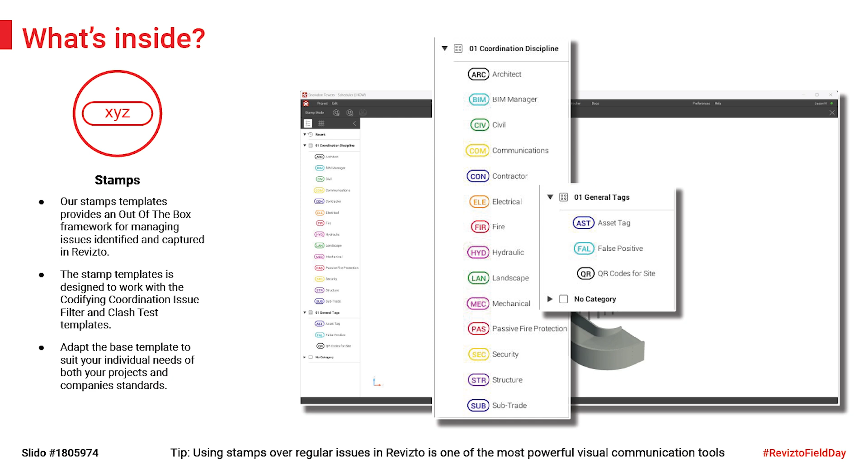Stamps, again, we've standardized all of these. The stamps are linked to the clash tests, so you could start to automate all of the process right out of the box within the 5 minutes, is what we've been telling people here.

Search sets, so these are all based off Revit families, Revit categories. So literally you can load these in and start to get some good results out of the tools straight from the start here. We've also linked it to IFC categories as well inside of Revit, so depending if you run an IFC workflow or Revit workflow, it will work for both of these.

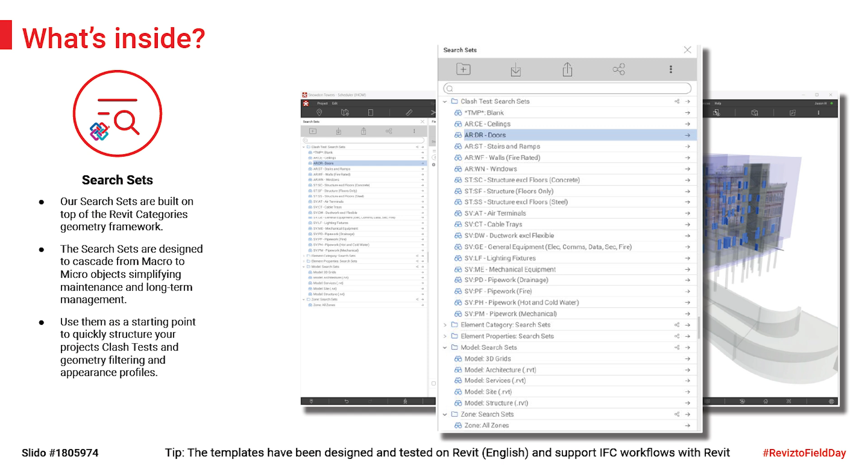And then the search sets are based on a kind of cascading system. By that we mean we've got the high level, which is the models, and these are cascading down into categories, properties, sets, and then finally clash tests at the bottom. By this hierarchy, what we mean is you can load it into different projects just by changing the model, which is the high level, top level search set. Everything is hung off this, so you literally just change the name of the project at the top level, and everything will work on that.

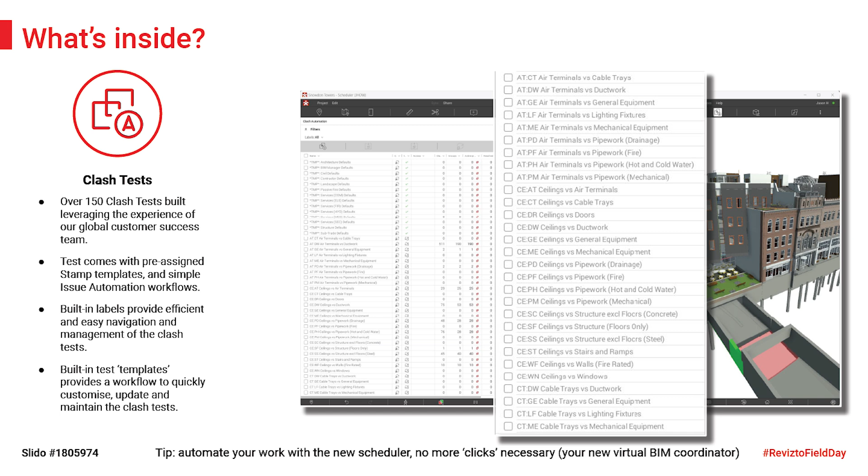So this is why it's so quick and efficient. We can get a project up and running quickly. I guess the clash tests is a big part of this. We've got over 150 tests in here, pre-assigned with different templates set up for architect or structure, MEP, things like that. All the stamps of load-in are all associated with tests as well, so again you've got that efficiency in there.

Properties based on Revit properties, we can very quickly get QTOs on the project itself by using the selection inspector. So it's a really efficient way. With the QSs, we've got some QSs down south who are using Revizto to get the quantities out of the model.

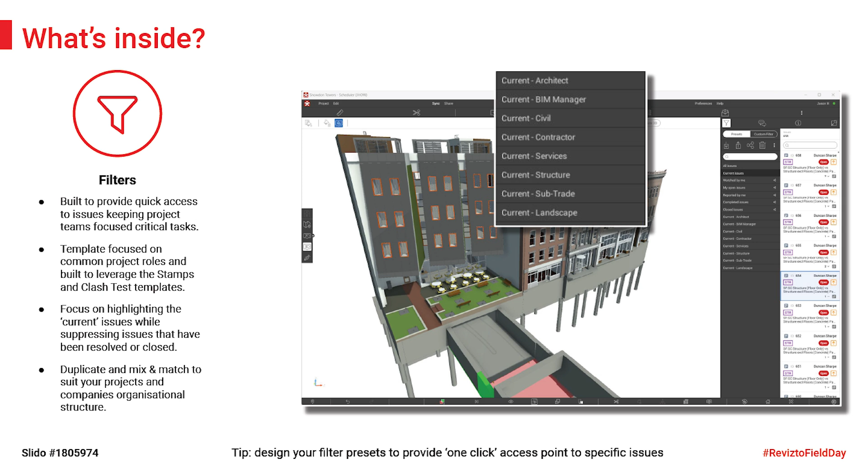Filters, simple one, but again it's standardizing the way that we work. These are inside of the issue tracker here, so we create filters for architect, BIM manager, MEP structure, things like that. Appearance templates, another easy one, but we've aligned some of the templates inside of the appearance templates, like BIM colors. So it's just applying colorization to that MEP - very simple to do, but we've standardized it.

We've got a webinar coming out in a couple of weeks, I think, where we're actually showcasing what we've done within Revizto, so keep your eyes out for that. Simple ones like architectural white card - things that you can standardize across the board.

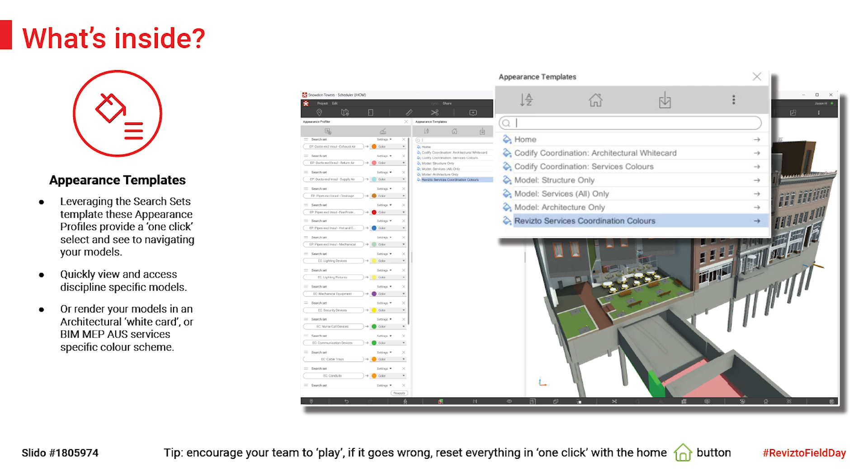So by 5.15 - people who've opened up Revizto this morning will notice this is hot off the press. We actually released it overnight. So what I'm going to show you today is just one of the new updates.

So what this enables you to do is automate a lot of the process, so you get the efficiencies out of the software. The main downside of the old scheduler is you couldn't run clash - that was a manual process.

What we've done with the new scheduler - this new user interface - is actually give you the ability to create tasks inside of the new scheduler. So you can still upgrade to 5.15 and have the old scheduler. It's an upgrade process, so when you click on new scheduler it's going to ask you what you want to do.

You can actually migrate all of your old tasks into the new scheduler, and if for whatever reason you want to push it back, you can go back to the old scheduler as well. So it's a completely new interface, and it's web compatible as well. We'll have a look at that in a second.

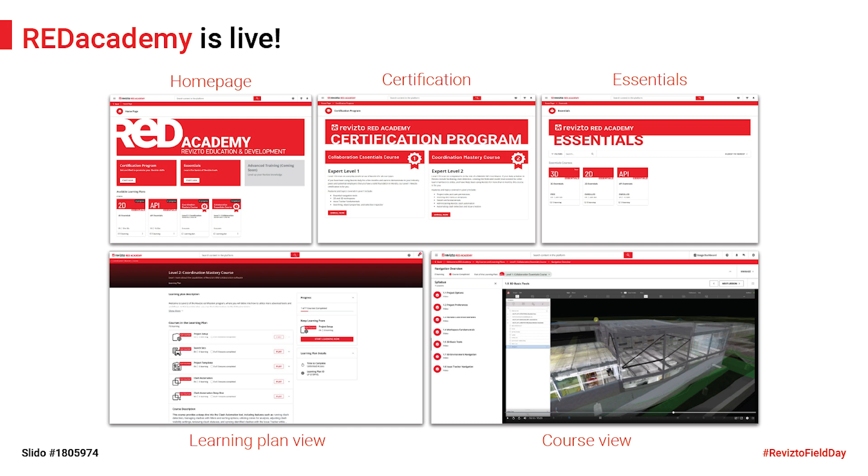It's live, go have a look. If you go around Revizto Academy, just log in, and the essentials course is free.

We've got a shout out to Jason Howden, who I'm sure most of you in the room will probably know. We'll be doing some percolating collaboration podcasts. There's a few people in the room who are already on it - Brad's been on it, Anton's been on it, Jonathan Dunn from South West Photography, he's here, he's been on it, Julie Jenner too. So we've got quite a few people from New Zealand that have been on there.

Some great insights into the whole industry, especially New Zealand. I keep stressing this to clients - New Zealand as a whole punches way above its weight in the global market. We see this, Jason sees this. Jason's been around the world and talked to various companies in design and construction, and he's fed it back to us. Basically what we're doing as a country is way above the benchmark for the rest of the world, so we need to shout about it and get out there, which is what Jason's trying to do with the podcast as well.

Final shout out to Revo, our global conference, coming out in February next year in Washington. Probably not the best location for February next year, but hopefully.

And also, when you set up the digital platform, the site control model, there's one gap: we want to make sure of everything we have done, for example, any builder's layout or set out we produced from the Revit file in the site control file. We want to know how the builder actually built it on site. We need to get the information back to us to say what they actually used the drawing for. For example, if the wall is set out 500 millimeters from a grid line, we want to know how the builder actually built that distance.

Because the site has lots of different conditions, they might be different. So we need the communication to be two-way. We're sending them the information, they're giving us back the information, and we update the model accordingly for the next phase of the work. The slides show we take as-built data as we go and feed it back into our digital site control model. We publish that information to Revizto, so Daryl, the project manager, and the site team can use good solid information to do their coordination work.

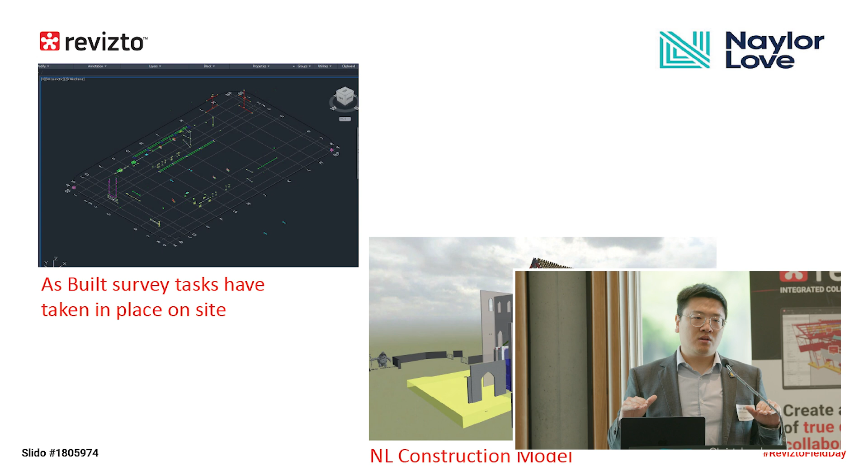One little thing I want to cover: from my background as a BIM manager, we have very limited ability to drive the construction process. We want to educate the project manager to drive the whole project, because they have a wider range to communicate with a lot of outside parties and internal teams. So if we can get the project manager teams using the tools, that brings the most value to the projects.

The last thing I want to cover is model structure. I know a lot of people here are BIM experts who have been using Revizto for years. They can find the geometry very easily using worksets, appearance profiles, and a lot of different fancy tools. But I'm facing the project teams, the project manager, the site foreman. We want to make sure that from the first step they find the right information. So the first thing was to make a very clear model structure, so people without any BIM knowledge can open Revizto, select the model tree, and find what they need.

As the project goes, we established a federated consultant model including all the consultant models, a federated temporary steel structure model, a federated permanent steel model, a federated reinforcement model, and a Naylor Love builders work model. Basically, it's clear, plain English. It doesn't have a fancy naming convention. It's very plain, so people can find the information as they go.

And to share a little on why we use Revizto from the digital perspective: Revit is our primary software, and from the BIM side the exporting procedure works really well for us. It's simple. From the digital point of view, it's also easy to set up for the site team. We can create a whole bunch of viewpoints, and Daryl can do that now as well. Stamps, tags, search sets, appearance profiles are easy to set up. And the last thing is great support from the Revizto team, because I've been down on the project.

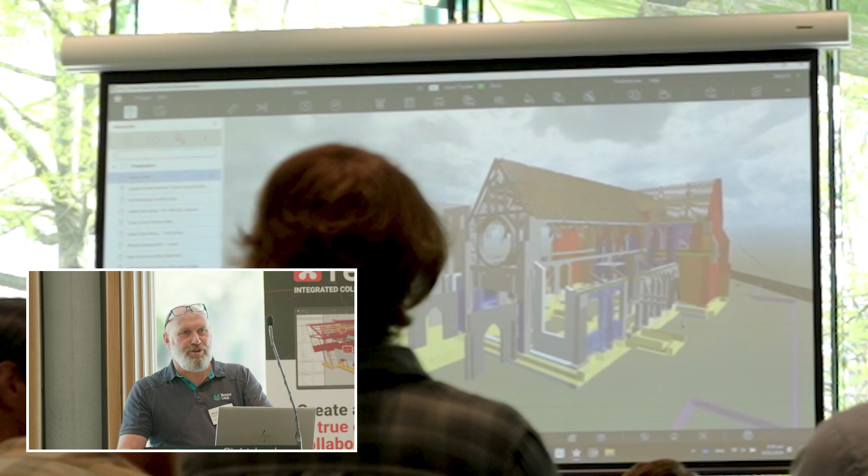So for me, this was my BIM learning journey. I started this project, and like I said, I just played around with some models. So the first thing for me was learning a bit of navigation. And it didn't take me long. I started figuring out how to move around quite efficiently for someone you might call an old dog learning some new tricks, because when I started in construction, I'd really never used BIM.

In recent projects, I'd definitely used it. I've used it a lot, but I hadn't personally done it. I've done it through others, and I've always needed other people to do things for me. Whereas the difference for me here was I started learning to use the 3D space myself.

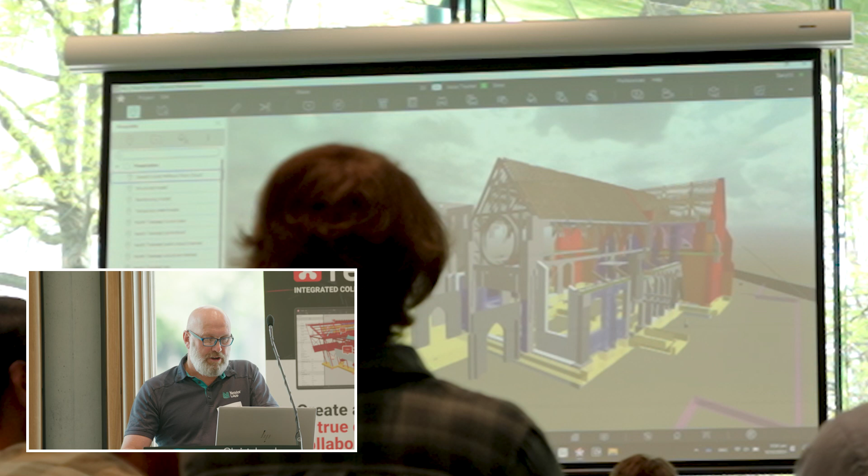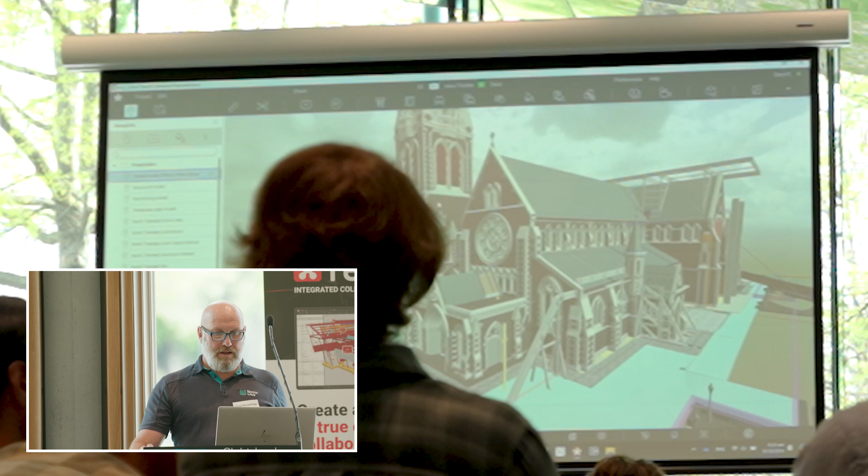And if I go through, we got given some models. We had an architectural model, a structural model. We brought in other models. We brought in our temporary works model from our steel sub. We brought in reinforcing models from a reinforcing sub. We brought in the services, all the models. And there's a lot of information there. And so I had to learn how to find what I was looking for. That's all our models together. There's lots of stuff there.

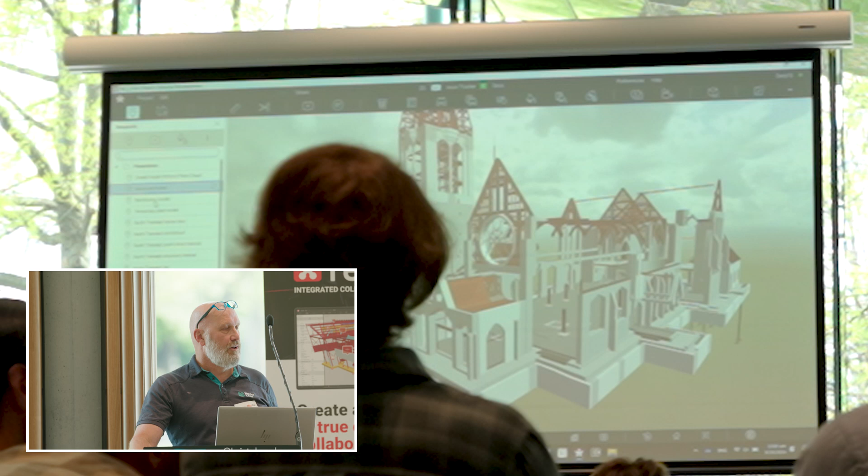The architecture is mostly seen because it's on the outside. But we had a structural model in the background, which is very good. But it doesn't have the detail. Obviously, the structural model won't show me the sort of things I need to know about buildability, about where the bolts are going to sit. Are they going to clash with something else? Because this is a heritage building. There's lots of heritage stone. There's lots of little bits and pieces inside that heritage stone where things are going to clash that we didn't know about until we got into the detail.

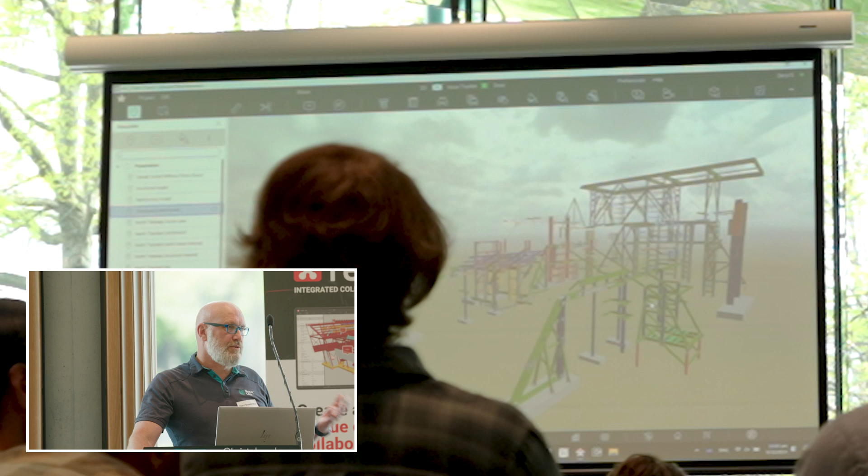So there's not just the permanent work. This is just the amount of temporary steel that has been modelled to date. This is just temporary steel, and a lot of it's in, and our permanent works have to work around this, and this work has to work around stone and heritage things and timber and all sorts of stuff like that. So there is a lot in here.

So for me, I had this learning journey to figure out how to look at it all. And as Sean alluded to, he set up the object tree with very clearly named models. Reinforcement, point cloud, site control.

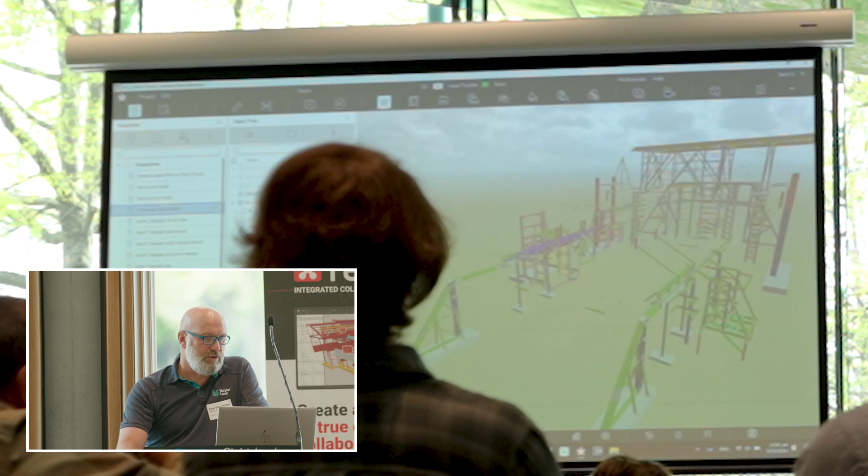So these were really good for me to help find my way around. So I've got the temporary works model. I can find the individual models. So as Sean said, he set it up in a way that for me, I could find what I wanted. I don't want to see the temporary steel. I want to see, say, the reinforcement.

It was very easy. And because I found it really easy and I showed it was easy to my site team, I had others start to use it who had never really touched sort of digital stuff as well. So it was navigation. I learned all sorts of things. I learned how to efficiently do cuts and all sorts of stuff. It's all new stuff to you, but it was actually really simple, and I knew I couldn't break it, so I could do whatever I wanted.

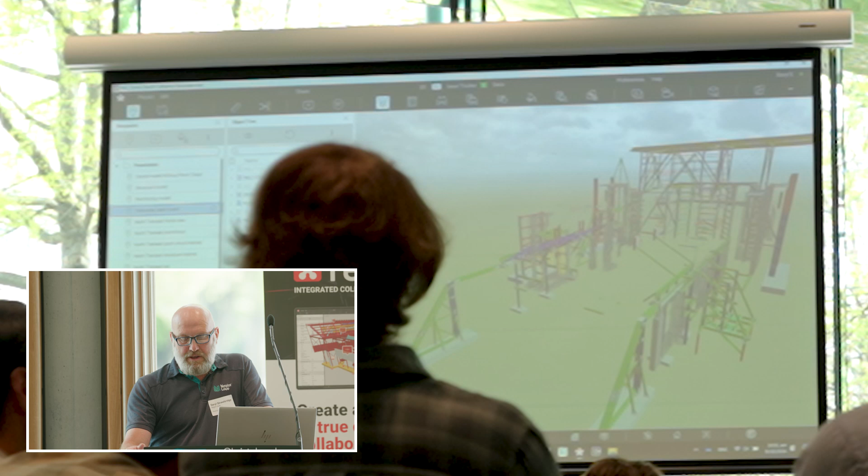But then I had to bring others on my journey, as I sort of talked about. So I started learning how to save a lot of viewpoints, and I just showed you a few viewpoints. I wasn't sure of my connectivity, so I didn't want to do too much zooming around. But so I started saving viewpoints of things when I'd hone in on something. I'd turn certain models on and off.

I'd go through, say, to the north transept, which is on the outside of the building, and there's just the north transept with all the models turned on. But I'd start turning things on and off, and I'd save this viewpoint. So I could say, hey, go and look at this saved viewpoint to one of my team. It'll show you what you need to see.

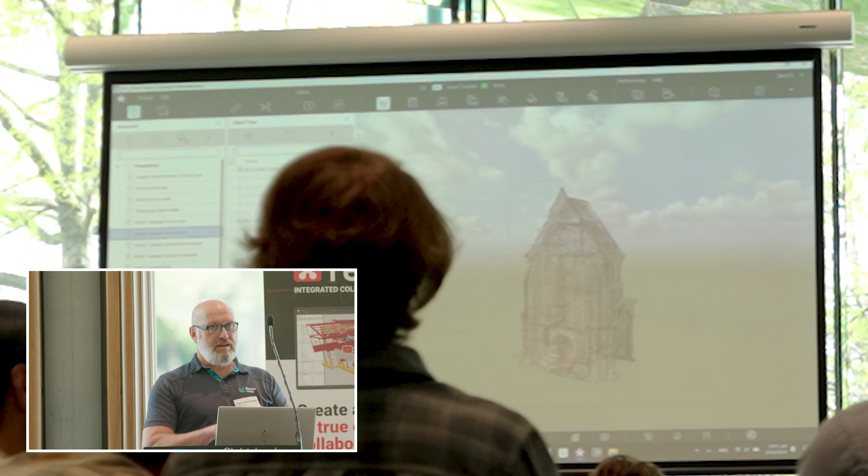So that was really easy for my team to click a button, get what they want to see, because there's a lot of information in this model, and there's lots of layers to that information, and unless you knew sort of how to navigate a little bit, it was quite hard to find. So I was able to do these kind of things, and this was my first communication to my team on how to get using it, and this is where it actually became useful.

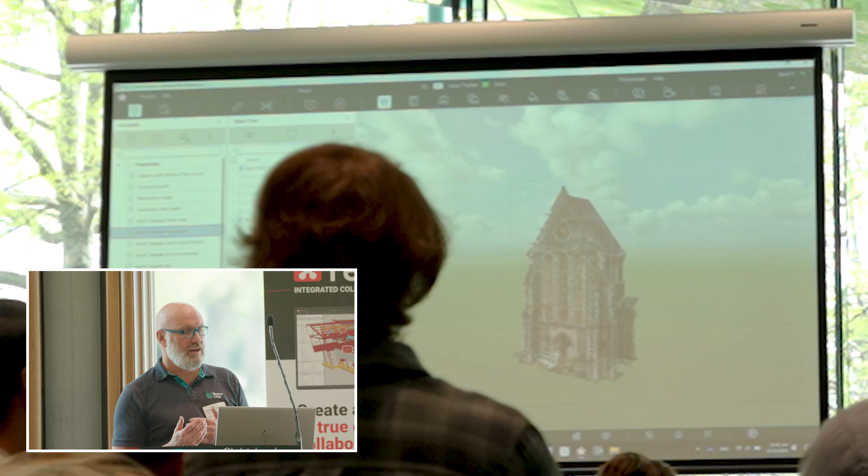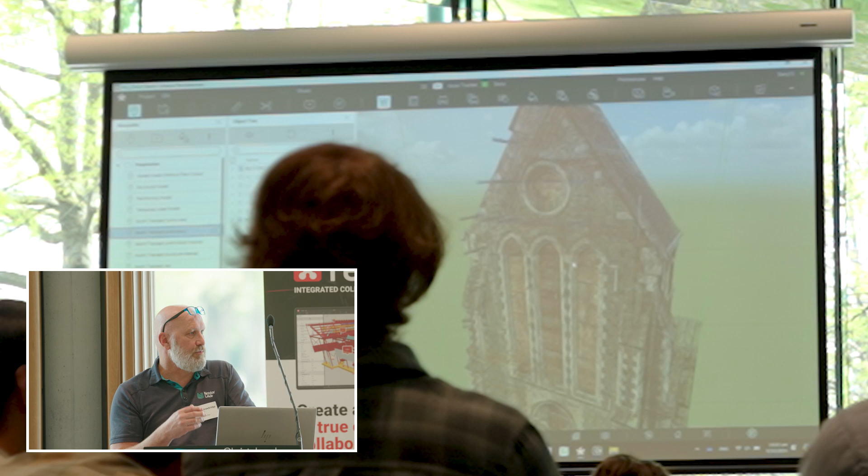There's some of our point cloud. Our point cloud's not one scan, it's multiple. There's 20 or 30 different scans because there's different layers to it. The first point clouds were done from the outside. There were some point clouds done through windows or openings. Once we got inside, we did some more point cloud scanning. Once we took down the heritage timber and took the flag out of the way, we did some more scanning. So there's lots of layers to this point cloud once we go inside.

And the point cloud was absolutely critical because once we got inside, we had a lot. This is inside the same area. Once we got inside, we had a lot more detail on point cloud that wasn't available when the design was completed. So we had this design documentation. It didn't have the dimensions. So we're able to go in through and see everything we needed to see. We could even see individual stones, so we knew what to line things up with.

And it's really good. And the fact that we've got layers of point cloud, I knew how to turn off a point cloud and turn on another one to see what was behind a wall or in front of a wall was really easy using this object tree. And that sort of started bringing people on my journey.

I started then using appearance templates so that I could say to someone, look, go to this viewpoint, just click on show the concrete, just click on show the reinforcing, just click on this. And those appearance templates made it easy for people who weren't savvy in BIM just to click on a button and see what they needed to see. And then they could understand the issues and look at the buildability.

Because when we first started, I was looking at all the issues in the buildability, but I needed to bring my team on that because I wasn't going to be the only one doing it. I started doing it just to get this set up. But as the project manager, I needed to get others involved. And they were all a bit nervous about using BIM because it was new to them as it was new to me. But we've proven that old dogs can learn new tricks.

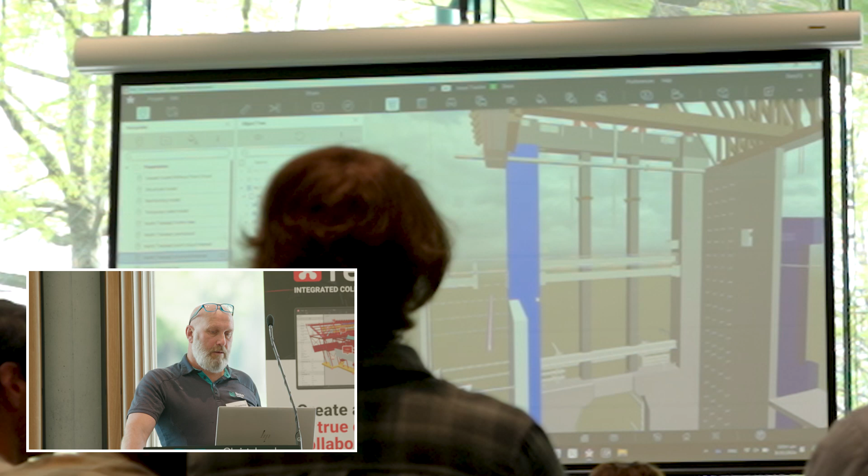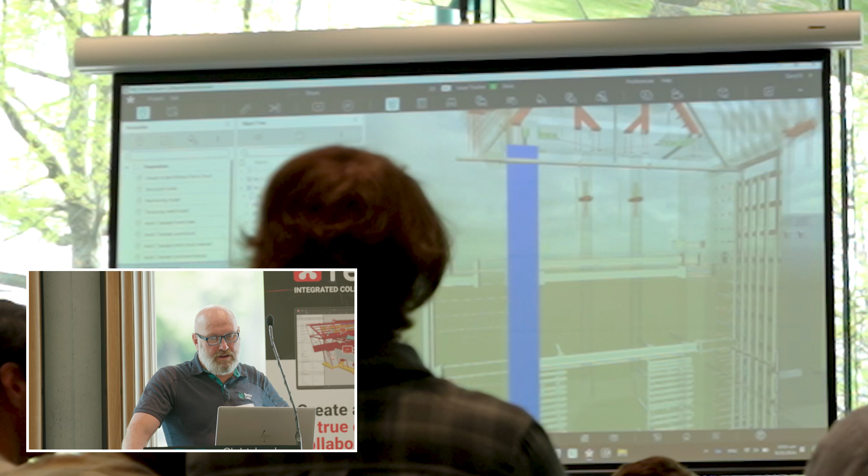And so we figured out which reinforcing bars would have to be coupled, because the engineer wouldn't let them all be coupled. So we had to figure out which ones clashed and do that. So we brought in the reinforcing to do this exact same thing, and we could then look at the reinforcing and find out exactly what we had to do. So in terms of buildability, it was great that way, and I was able to bring others on this journey by showing them these, and they were able to understand.

I could push this out, and then, with communicating this, I was saving the viewpoints. But then the issue tracker was really great. I'd see that this reinforcing bar clashed with this steel, and I could just put an issue stamp there for the reinforcing detailer saying this bar has to be coupled. Actually, the first step was: structural engineer, can we please couple this bar? And the structural engineer said yes, and then I'd put that issue up to the reinforcing detailer saying this bar needs to be coupled, but the others can't.

So for me, the greatest thing here was the way I was able to communicate all the stuff I'd seen, learning this sort of stuff. And by the way I'd done it, I was sort of teaching my team to do the same thing. So they were able to pick up the same ways of doing things quite simply, quite quickly.

A bit more on how we solved some of these challenges. I showed you some of the challenges, a bit more on how we solved them. Like I said, we had point cloud data. We had consented drawings without dimensions. The concrete wall would say minimum 3 meters long. We had no grid lines set out, and we had no set out of that concrete wall. Minimum 3 meters long within this stone wall. Minimum 700 thick. Those are the dimensions we had. We had to make that fit.

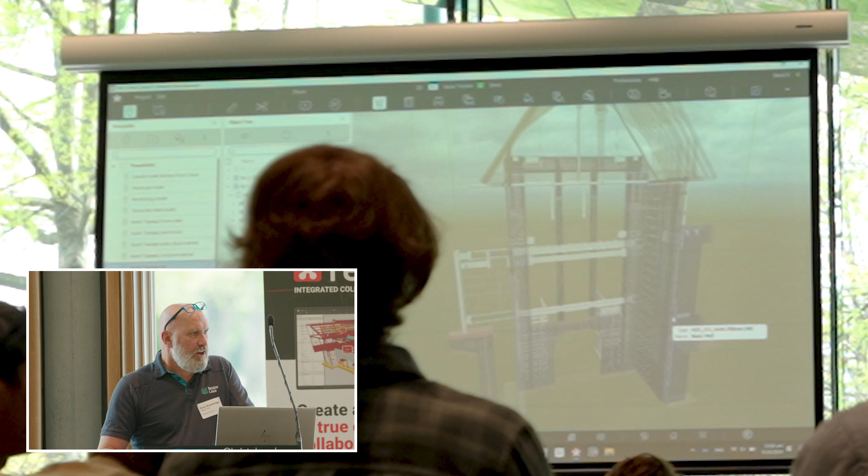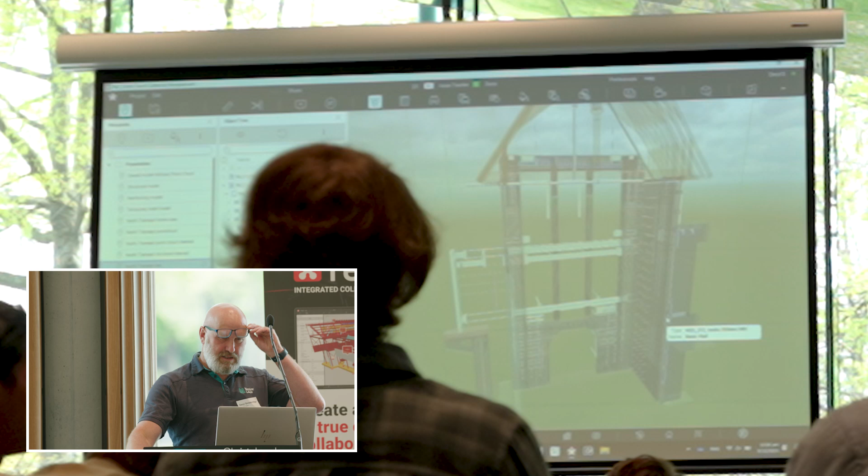So this is where Sean became really useful using that point cloud data. He started modeling these things we're seeing, and he started modeling them within the point cloud. He did all that in Revit outside of this space. But say for this north transept area, he was able to then produce these models that we're looking at with our concrete. He did these 3D drawings, and he did 2D drawings to go with them.

And we were able to get consultants back involved saying, look, here's our interpretation of your drawings, both from a heritage point of view, because the stone cover is going to be reducing here, from a structural point of view, because things didn't work out quite the way you thought, the dimensions are changing a bit, from the architect's point of view. From everyone's point of view, we did our interpretation of how that would fit, and Sean modeled it all, and then he pushed that out to 2D drawings. So for that same area that we're looking at,

all these 2D drawings were pushed out into Revizto, and that was the area that's the viewpoint. We're just looking at 2D drawings, but this time they're dimensioned. We showed the temporary works, we showed the permanent works, we showed other things, and that's because the temporary works was such a big driver on this project on how we built things. We couldn't just go in and build a permanent structure.

So these 2D drawings we could then produce within Revizto as well. Using the issue tracker, we could get people to comment on things. Hey, is it okay if this dimension changed? Is this okay, because it doesn't fit the way you thought it was going to fit?

So Sean produced these 2D drawings. They were loaded into Revizto as well, so we could work within one space to look at the 3D and 2D versions of the same interpretation.

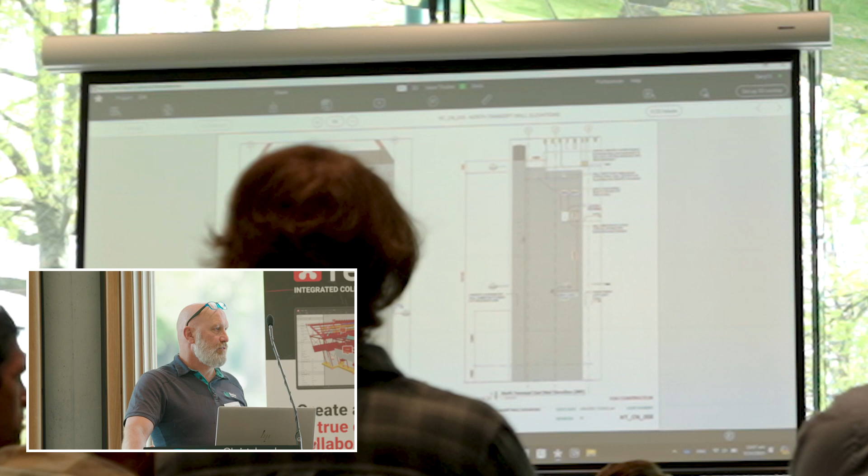This is how we solved the issue of having design drawings that weren't dimensioned. How do we make that fit, and how do we translate to the guys on site what to build and where the grid line is? So Sean set up grid lines based on best fits, then set up what we called the concrete shapes, named because the shape of the concrete was the first driver on how we made this work.

It worked out really well. We created feedback loops within Revizto so we could talk to the consultants to solve issues, then talk to the subcontractor about how that works. The 2D drawings could be pushed out and the site team could build straight off these drawings.

We could do the same thing. We'd have this 2D shape, push it out to the subcontractor saying this is our concrete, this is where the concrete fits. The rear bit is actually a structural steel frame that sits on top of the concrete, so your frame has to tweak in shape and size to fit within this. We'd have separate drawings for each part showing where everything fitted, and the steel contractor would work to this shape because we know it fits.

The point cloud was left on a lot of these drawings so people could see that it was going to fit, and it worked really well as a way of communicating and solving these issues.

For buildability, I knew it was starting to get successful when I saw people in our own team who didn't really like technology logging into Revizto to see how it was going to fit. Or even more successfully, when I saw a stonemason have Revizto on his phone, pointing at the wall saying, oh, that's what the concrete going there is going to look like. That's when it became successful, translating it from not just the BIM world but to a construction world and how the guys on site could use it to make sure things fit.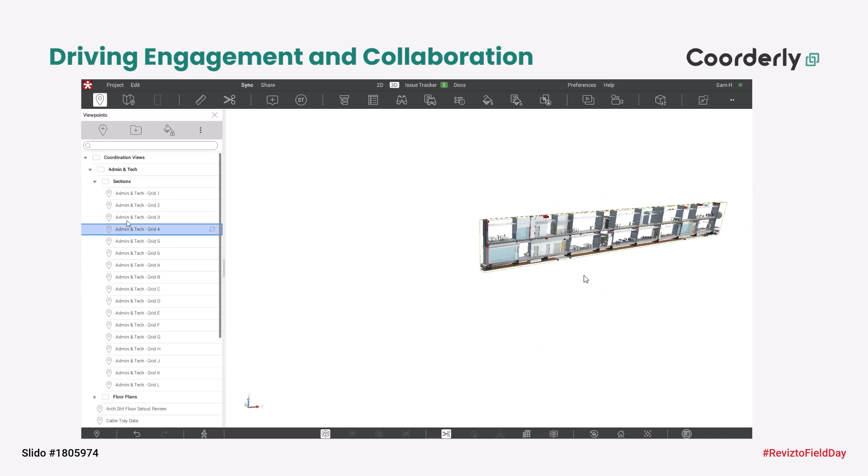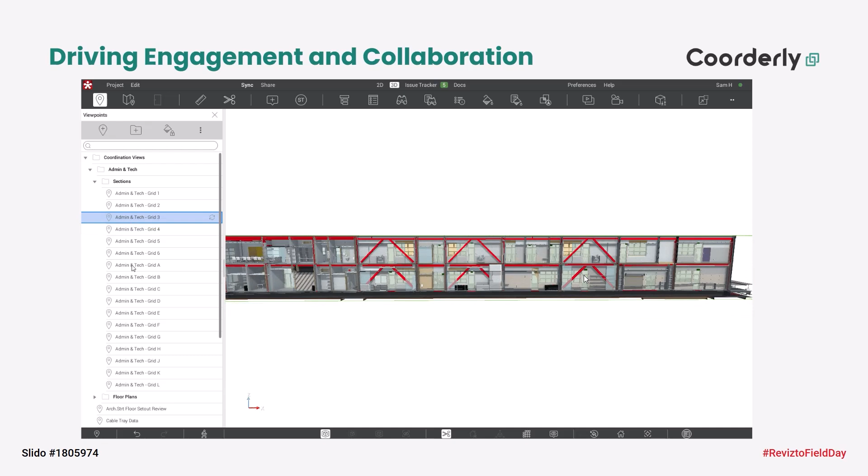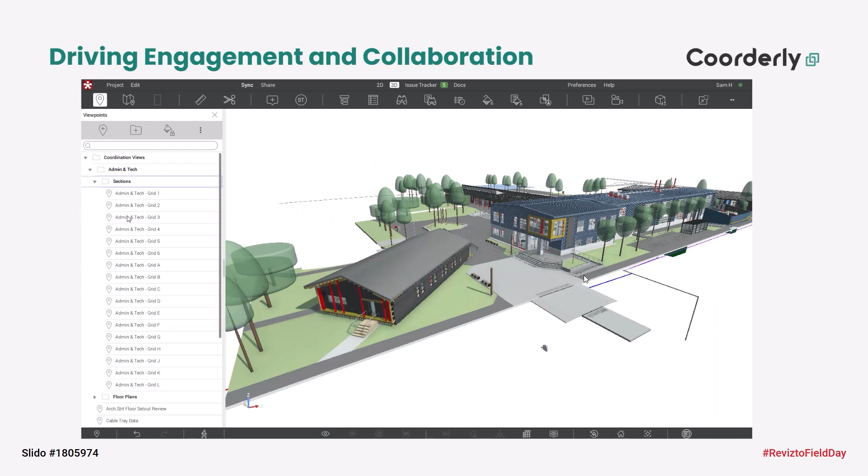There's a few little bits and pieces I like to set up that I get good feedback on, and people are more likely to come and use it. I think a lot of people are still looking at 2D drawings a lot and know the project through that lens as well. So this is just a simple bunch of viewpoints set up within Revizto where people can quickly jump straight to the grid line they're interested in. For those people who might be new to Revizto or not quite as savvy at navigating, this is just a quick way to get right to where you want to go.

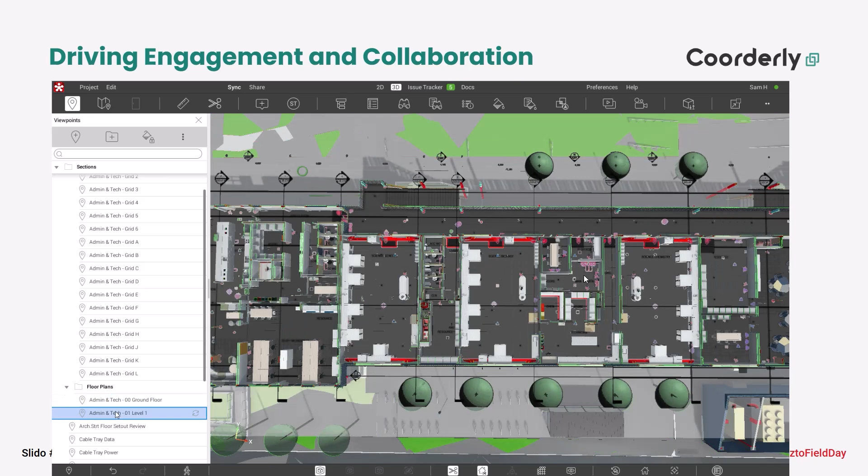And the same goes for floor plans—just having pre-made views set up with floor plans ready to go. I often encourage the architect to export DWG floor plans that we can link in to give that extra layer of information in the models.

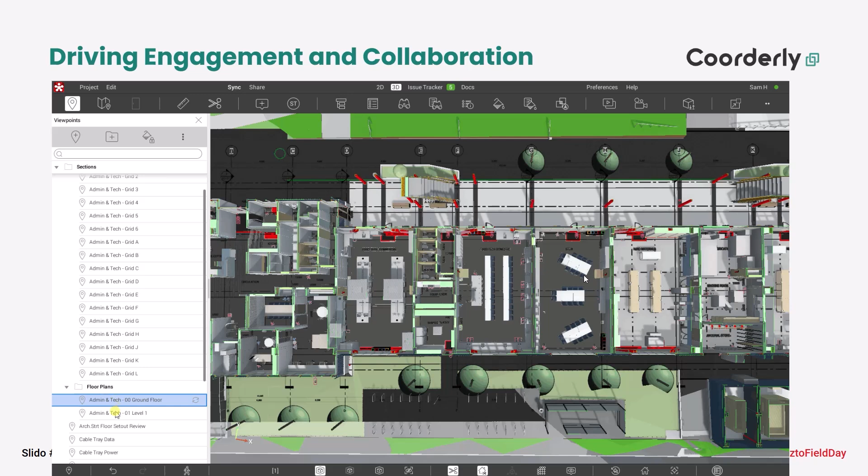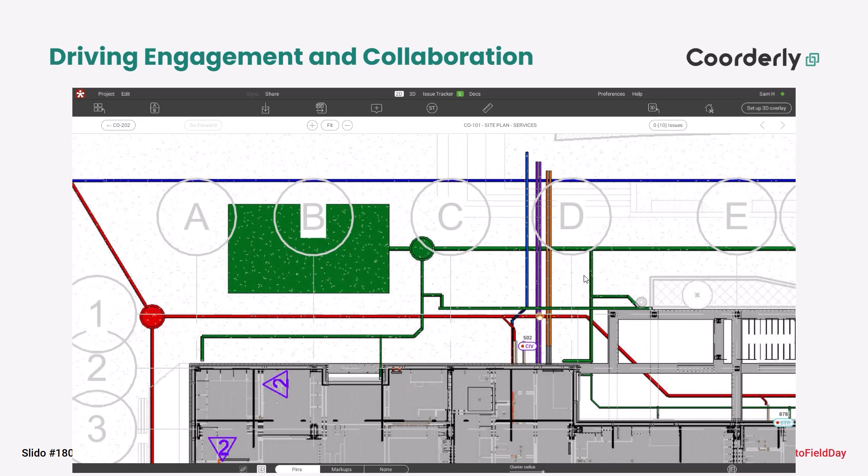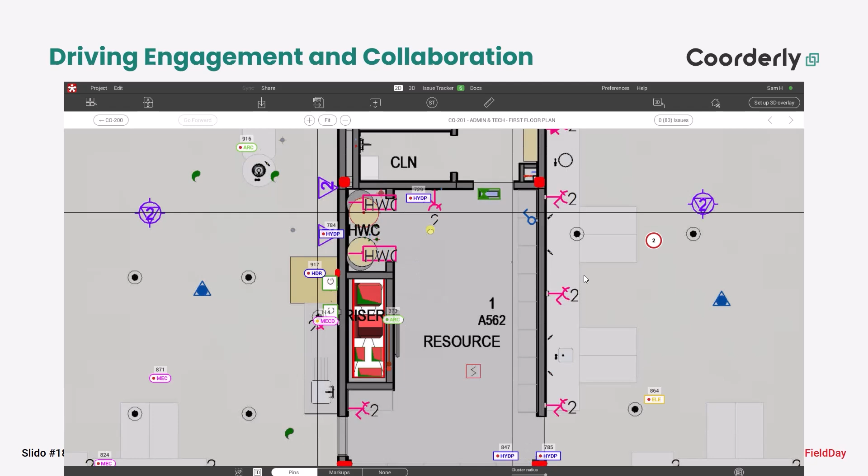Then moving into the 2D, with each 3D model export I'll also have a range of views set up in the sheets, in the federated model, generally with all of the disciplines turned on, so you have that sort of federated viewpoint. That might be like services in the ground, or even just ground floor plans with all the symbols, room names, everything turned on—gives you quite a rich viewpoint where you can look at everything in one go.

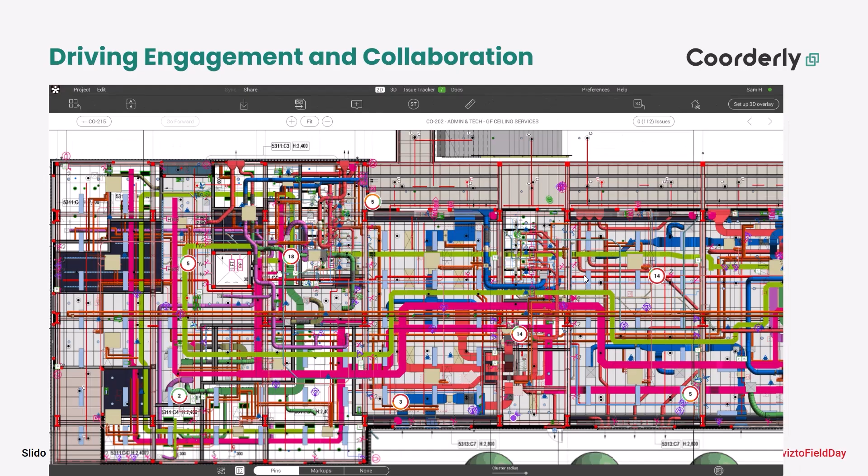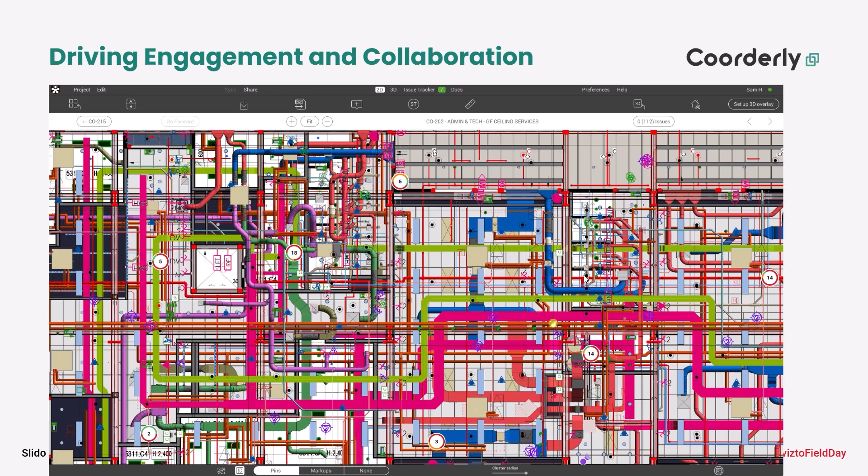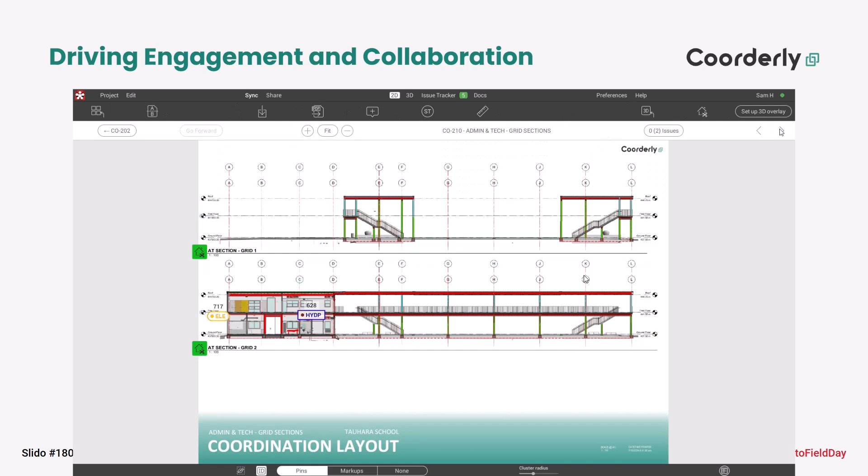One of the first things I always see services coordinators from main contractors do is grab all the PDFs from the services trades and overlay them together in Bluebeam to look at what they're all doing together, particularly when you go into coordinate seismic and things. So I typically have one of these views in Revizto as well, like all the ceiling services turned on in a 2D—it can help paint a big picture of what's going on. Then the same again, all the 2D sheets with every grid elevated and all the disciplines turned on. These drawings are updated every day with the latest model drops.

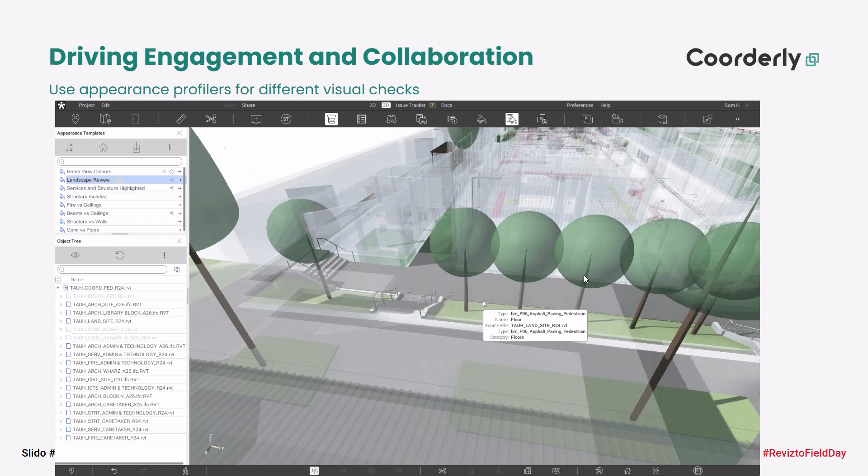For me as a BIM manager, a lot of the work I'm doing is I still like to do a lot of visual checks—don't rely too heavily on clash detection to find all the issues. I think there's just a lot of context that comes with experience that's easier to find looking through the model yourself. Appearance profilers are really powerful—I have a whole bunch of quick appearance profilers that help me skip between different checks in the model, so at a click of a button I can be looking at concrete versus pipes, and another click I might be looking at...

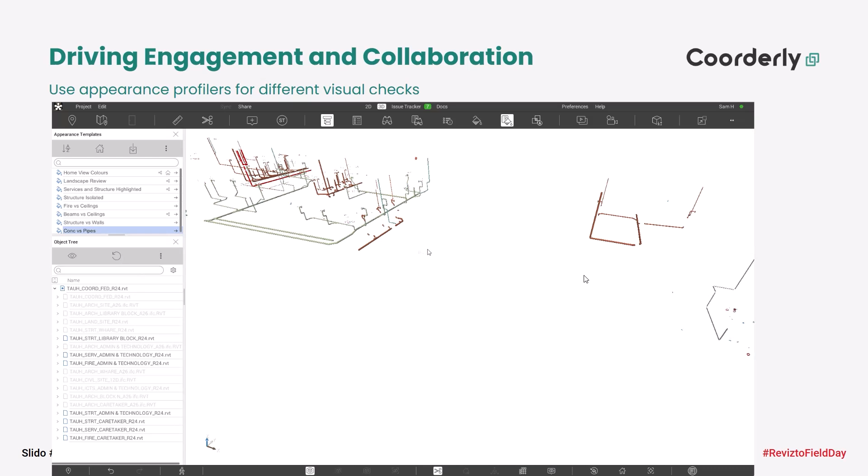Columns and beams versus wall lines, using different colors to really make them pop. You can do a really quick check here and spot any columns out of alignment or walls out of alignment or something like that. I think appearance profilers can really speed up the amount of review you can do in a short amount of time.

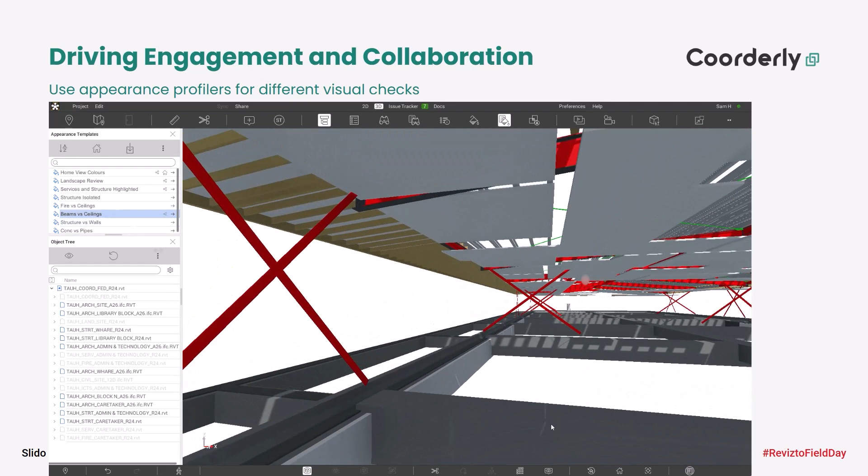So yeah, I like to have quite a few of those set up. It might be just ceilings and beams highlighted, so you can quickly spot whether the beams are hanging below the ceilings or something like that. So appearance profiles are very powerful, and colors.

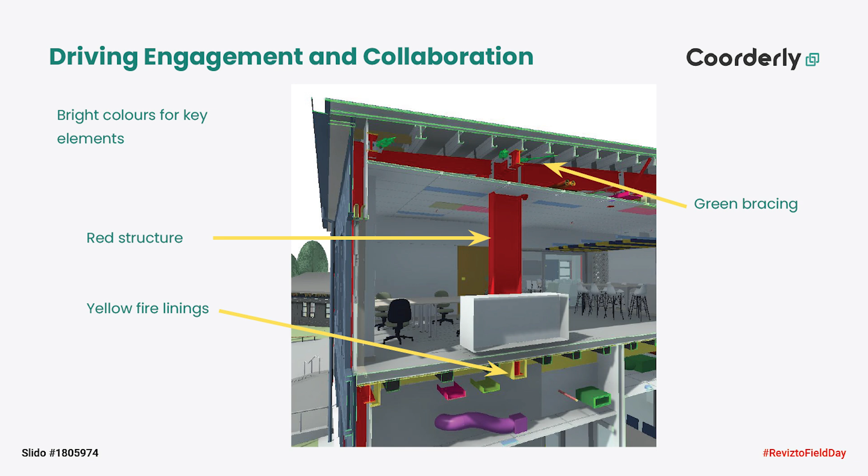Yeah, again, it might seem like basic stuff, but I think it all really helps in the long term. So I like to have a bright structure, and then a contrasting color for things like fire linings, so you can quickly see flanges might be protruding, or any sort of buildability issues like that.

And then I've probably got like hundreds of these examples, but I'm a big advocate of lintels being modeled, particularly in projects where there's limited ceiling to floor space. That just catches those on-site problems later.

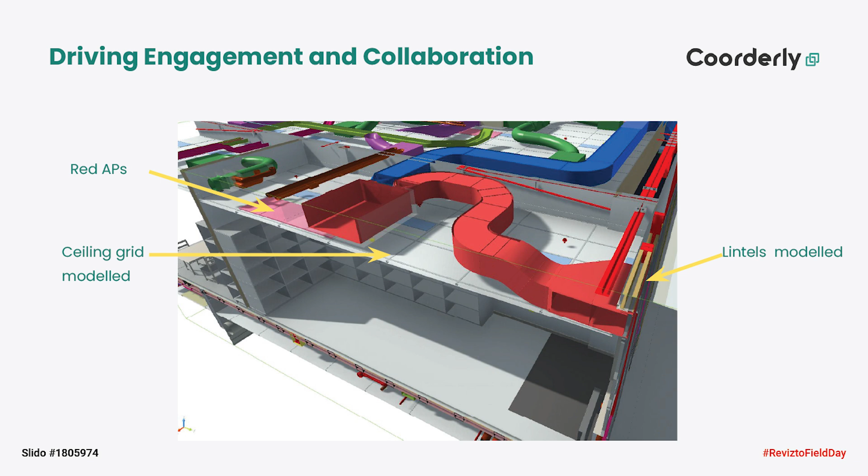In this particular project, I've quite enjoyed having the ceiling grid modeled. It's obviously really helped with the reflected ceiling plan coordination. And then again, just the use of colors, having red access panels in the model just means you can quickly scan over top of the services and make sure anything that needs access has access allowed for and has clear space around it.

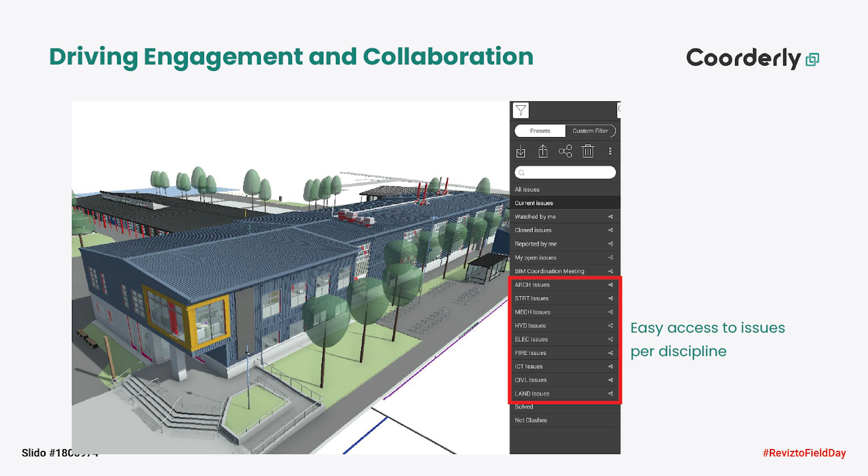And then, as Chris mentioned before, they've now built this in, but another small way of making the consultant's life easier in the issue tracker space is just having pre-made filters set up so that they can jump straight to their own issues. The stuff isn't rocket science, but it saves a little bit of time if you compound that over a long period of design. It helps, particularly for the MEP trades - they can quickly switch between the disciplines they might be working on.

And then when it comes to the issues themselves, it depends on the project, but I'm quite guilty of spending a lot of time on each issue, making sure that the description's really clear. The title needs to be either a really clear action item or a question that needs to invoke a response if you want to get it moving.

I spend a bit of time getting a good angle on it in the image, really pointing out the obvious. It's interesting sometimes how what you're saying can be interpreted in a way that you weren't necessarily intending. So just making it really obvious means that the person looking at it and responsible for it can quickly address it without ambiguity.

And so if they can quickly resolve it and move on to the next one, you're getting better results out of the design team. So I think it's worth spending a bit of time making the issues really clear. And obviously the priority is really important too - if you've got a whole lot of issues on the wrong priority, the person resolving them is going to get disillusioned pretty quickly, so I like to emphasize that.

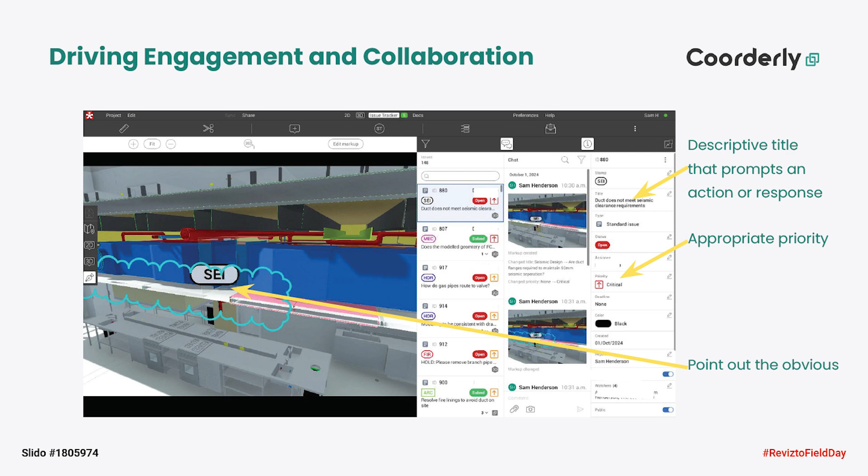And then in terms of coordination meetings, when it comes to agendas, it's really important to only have issues on the list that actually require multidisciplinary input - that's the whole reason why you're getting together in the meeting. There's no point having issues that can be resolved single-handedly by someone, that don't require discussion. That's just a waste of people's time. So that's probably the most important thing around issues for coordination meetings.

I typically find around 30 to 40 issues an hour is good for design phase, and roughly half that for a construction phase project. I think you just tend to get in the weeds a bit more in the construction phase, so everything takes a bit longer.

And then I'll start the meeting with a bit of a summary of the key findings from the last coordination cycle. And then when we get into the issues, it's just good practice, as a courtesy, to start with the trades with the least amount of issues so they can drop off the call or whatever.

It's a bit of a feature request. At the moment, I'm exporting a report that sets the agenda, and I find a snapshot of how the issue resolution's trending - how many new issues, how many were solved - plus a snapshot overall of total projects, how many have closed, how many are still open or in progress, and how they're trending over time is powerful. Clients and PMs don't necessarily need to come to coordination meetings, but a quick snapshot at the start of the agenda to see what we're working on is valuable. At the moment I'm stitching these together with PDFs - exporting the dashboard and the issues separately and bringing them together. It'd be cool to do that in one export.

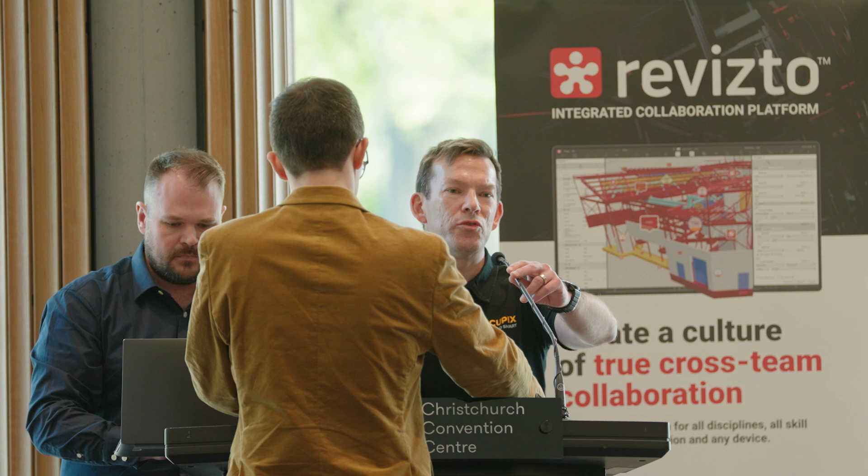Anton's going to present on how he's using Cupix to do model validation. Cupix is a 360 reality capture platform - we use 360 cameras to go out and very quickly capture site conditions. We're typically using it in construction, but Anton's going to show how Warren and Mahoney are using it for some of their model validation. So I'll hand over to Anton.

Good luck. Thanks mate, no worries. Terrifying? All right, fine, don't worry.

I'm going to share a little bit of how reality capture fits in with a design practice and where it sits in projects for us. I've got three key topics I'll run through today. I'll talk about our team inside Warren and Mahoney that enables digital processes on projects, then the projects and workflows themselves, and finally some future innovation we're looking at and how we'll integrate it into our projects.

First up is our advanced BIM team. Most of you will be fairly familiar with Warren and Mahoney, being here in Christchurch, so I don't need to talk about that too much, but our goal is to be the most influential design practice in the Pacific Rim, and I think technology and innovation is a real driver of enabling that.

Our journey with technology kind of transitioned in 2013, really early. Jason Howden joined the practice, and we transitioned from MicroStation into Revit at that point in time. So we've had a really accelerated journey, I think, with technology over the last kind of 10 to 11 years.

So yeah, moving through time, Navisworks and Revizto, carrying on to Revizto 5, enabling a lot more. Revizto on its own and enabling clash detection was really, really powerful, and being able to drop Navisworks as part of the process really sped up our process and enabled project teams a lot. And then this year is where we've started talking with the Cupix team and looking at how we're going to engage reality capture as part of our process.

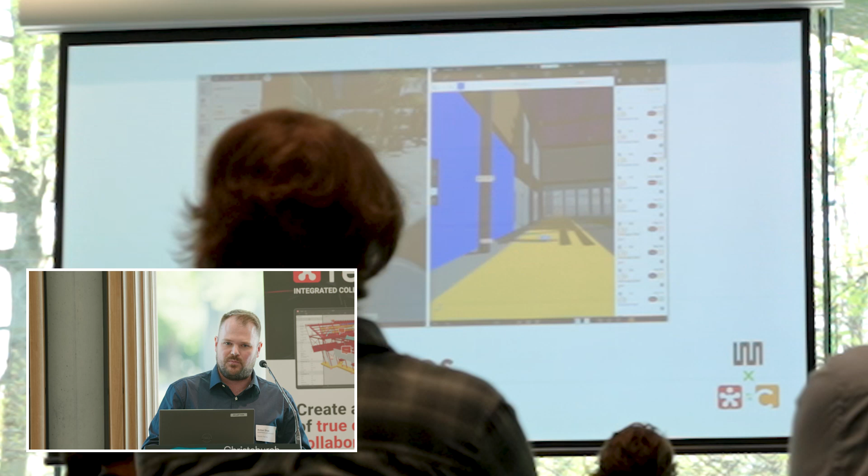So this is a heritage project that I mentioned before that we captured with quite a detailed point cloud scan. I mean, the 2 presentations today have been fantastic with all of these features and explanations of them. So again, appearance templates are super powerful.

Being able to overlay point clouds on top of the model, make sure the modeling teams are modeling aligned or modeling everything that's there as well. Having a point cloud can often show where there may be missing model elements inside of the project, which is super powerful.

We established a workflow on this project where I think this Cupix integration of attaching the pano photos onto these issues would be very, very valuable for the team. So we came up with a set of stamps. These stamps are essentially capturing different things inside the heritage building. So there was removal of heritage fabric and salvaging it, keeping heritage fabric in place, removal and store it, or removal and dispose of it.

So having those different workflows inside of the project enabled the contractor to go around and mark those things and understand what was going on. You can also have QR codes set up, barcodes and things like that for those items so you can reference them whenever you need to. But the powerful part of Cupix and where I see it fitting in is you can attach photos from on site as you're walking around onto those items, so you don't have to capture separate photos. You can get all of that heritage fabric attached to that issue inside Revizto.

And then this is the workflow that we had come up with. It was a bit more manual in the background. It did have some automation to it, but essentially I could create a family inside of our federated model that was a photograph. And then with that, you can make a stamp on top of it, and you can attach a 360-degree photo from your point cloud scanner at that point. So this was kind of the initial concept I had in place for utilizing what we're already capturing with our point cloud scans and all of that existing data, and how we can give our project team access to it. And I think Cupix just elevates that because you can start attaching photos over time.

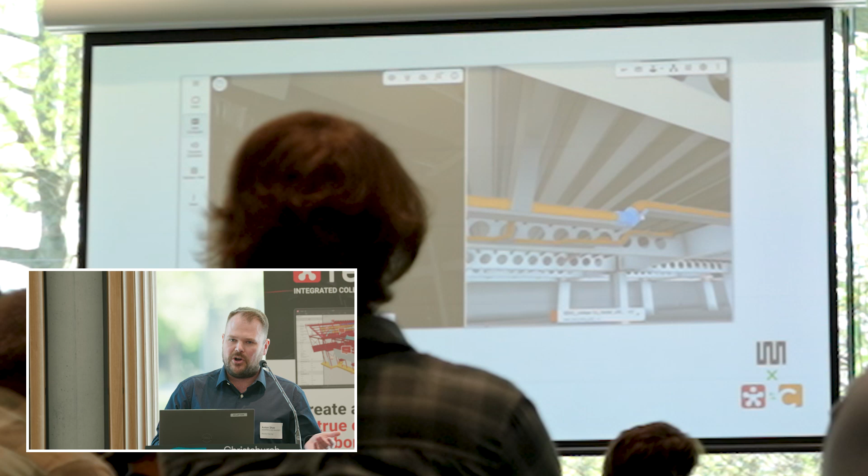And then going along a bit further, here's a corner that I found, and you can see that the shop drawing model, like it may not be critical or it may be, but it is actually slightly different to what they installed on site. And then you can have that question, does that need to be updated? On this project, there was an extremely high level of detail required for our operational digital twin. So we can start asking those questions of the operations team. Is it critical to have everything to the millimeter accurate, or are some things like this okay to be different in that scenario?

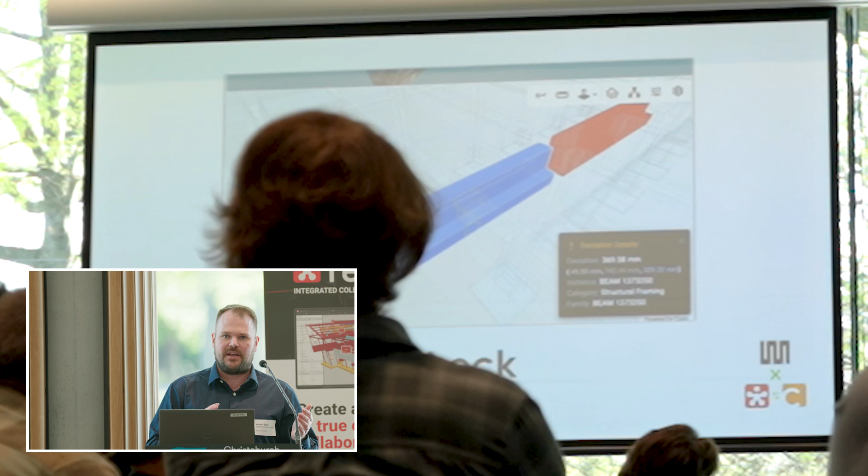Next up is a computational checking of models. So essentially, as you're walking around site, it's pretty powerful in that sense that it captures a point cloud at the same time. I think what's really important to be aware of here, though, is picking the right tool for the right job at the right time. So the Cupix scan is accurate to 20 to 30 millimeters roughly, but point cloud scans are millimeter accuracy. So making sure you're using the right tool at the right time is important here.

But being able to utilize point cloud scans for model validation and checking to see deviation from models to what's been installed on site, I think is extremely powerful. And a thing to note there is you can pull other point cloud scans into this platform and utilize all of the data together rather than it being siloed.

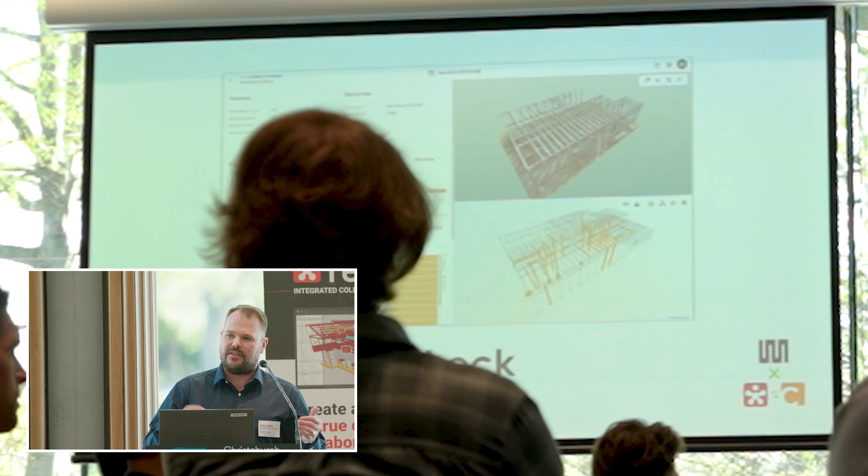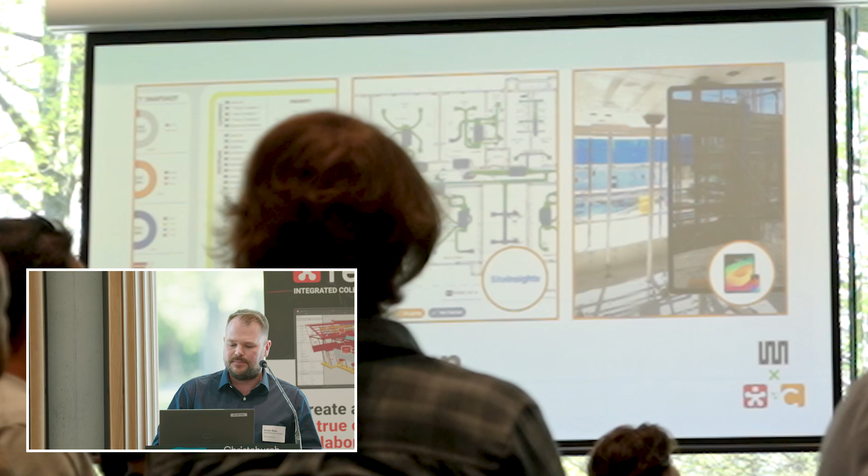And then my last topic that I'm going to be talking about is future innovation. So this is what we're currently working on and what we're enabling on projects, and kind of where I see things going with the data that we're going to have available from Cupix and what will happen in the future. So I've got 3 parts that I'm going to talk to. One is Power BI and reporting out of Revizto. The next will be the Site Insights platform out of the Cupix tools. And then I'm going to talk a little bit about mobile devices and what's possible on site with them these days. So I'll move into Power BI.

So project dashboards. I've been working quite a lot with our design teams recently about project dashboards and how we can utilize all of this information we have in Revizto. I think data is on tap these days. Data gets generated so quickly and so much. And it's about finding the relevant information out of that data and then presenting it in a consistent way, in a concise format for the right audience.

So Power BI has really enabled us to curate pages or data sets to the right audience at the right time, plus giving them tools to really drill into the detail if they want to. At a high level, some members want to look at everything. Some people want to look at their specific disciplines. Some people want to look at different phases, and all of those different workflows that are happening on projects is really hard to capture sometimes.

So Power BI allows you to really cross and filter this data to be what you need to be seeing for what you're doing. The second part to that is I know that we just saw heat maps inside of the Revizto platform. So what I've also done is built heat maps outside of Revizto itself as well, because not everyone is always inside the app or in the tool. Some of the project leads just want to know at a high level where their teams are working and what's going on and where the stuff is outstanding.

So what I've got here is a set of heat maps that exist inside of Power BI with the same set of filters, and you can start just filtering down to what you need to see out of it, and you can check the age of issues at the same time. And from there, those little pins that exist on the floor plate, you can click on those, and at the top, you'll get a lot of information about that particular issue, like where it exists, who it's assigned to, etc.